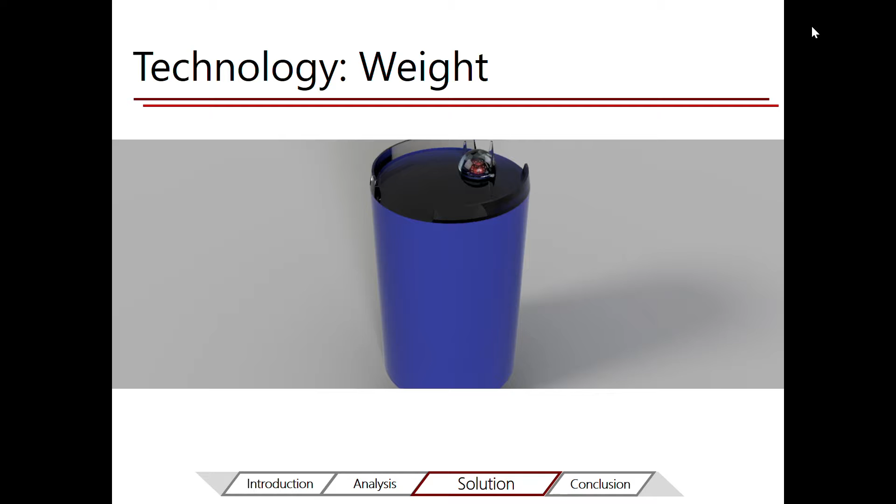So now let's look into how it looks in terms of the technology itself. This is a live rendering of what the tote would look like with its modification.

You'll notice at the very top there's a small module that houses everything this barrel uses for its modifications. That's where the battery packs would go, that's where the IR sensor is, and that's where the antennas are housed as well.

There are three key aspects to the system I want to point out. First, only one barrel will have a cellular antenna and the rest will have a Bluetooth node. We'll talk more about that later in the communications section of this presentation.

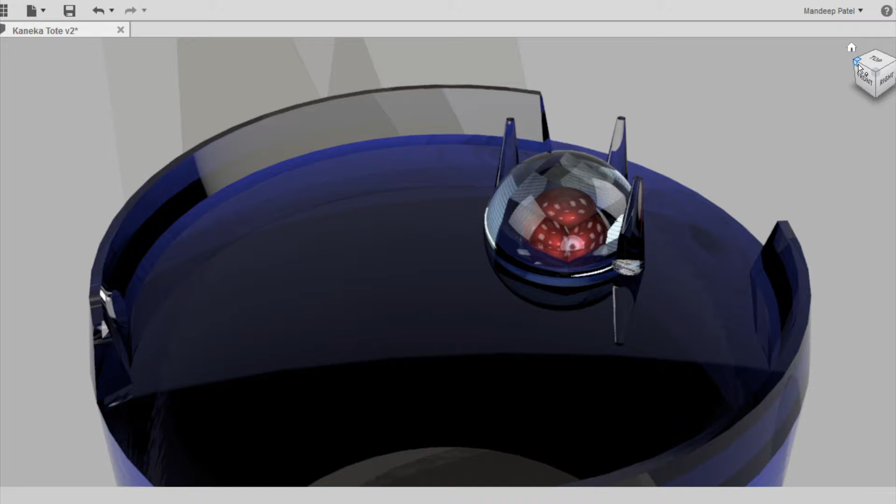The second aspect is that the bottom of the module is covered in glass, and the top can be covered with any material. That glass allows the IR sensor to look down and see how much of the material is left.

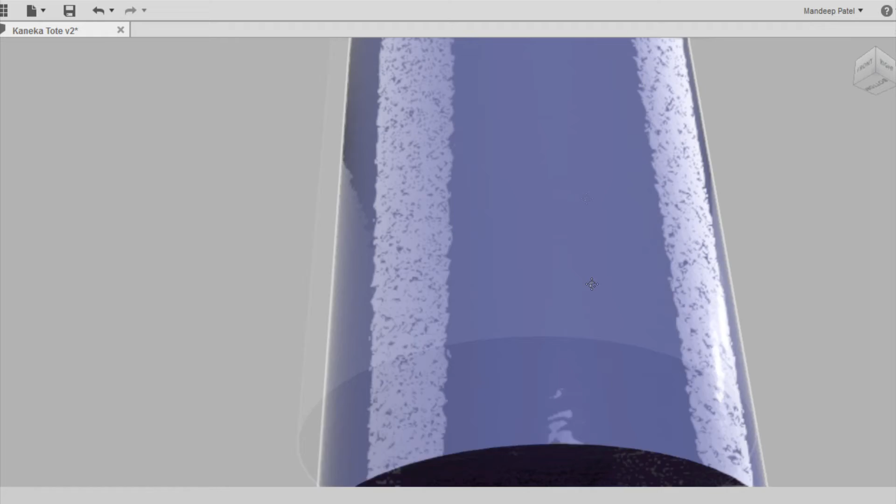The third aspect of this modification occurs on the bottom of the tote itself. At the bottom of the tote, you'll notice there's a hexagonal or octagonal outlet, which is where the material actually leaves the tote. You can see that this has not been modified in any way whatsoever.

This allows us to automate the data entry and data collection without interfering with the day-to-day movement of the totes. On the actual route, I noticed multiple points where third-party workers would move the totes from one method of transportation onto another. What I wanted to avoid for the company was having to retrain those third-party workers because of modifications made to the tote.

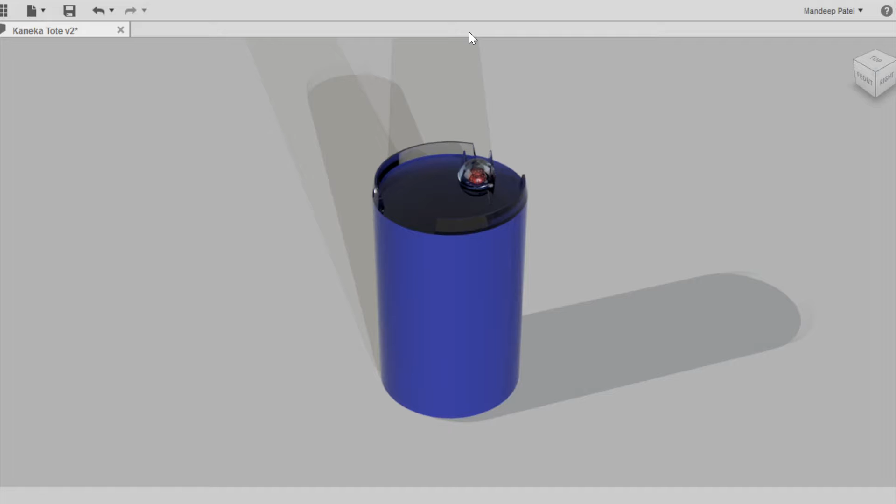So that is the entirety of the weight collection system and the modifications that would be made. Now let's talk about how the communication system works.

This allows us to create a network where signals can be sent over Bluetooth until they reach the master signal, and then that master tote can send data out to a cellular network and get that information back to home base.

This system was designed to have some overlap just in case a tote moves slightly out of position. It was also designed to reduce the cost of the system by only having one master tote using a cellular signal, which also reduces the power requirements for the system as a whole.

Lastly, this is a calculation of the cellular D-cell batteries. Using 2 D-cell batteries, the slave units have an operation capacity of 400 days, and the master unit has an operation capacity of 4 months.

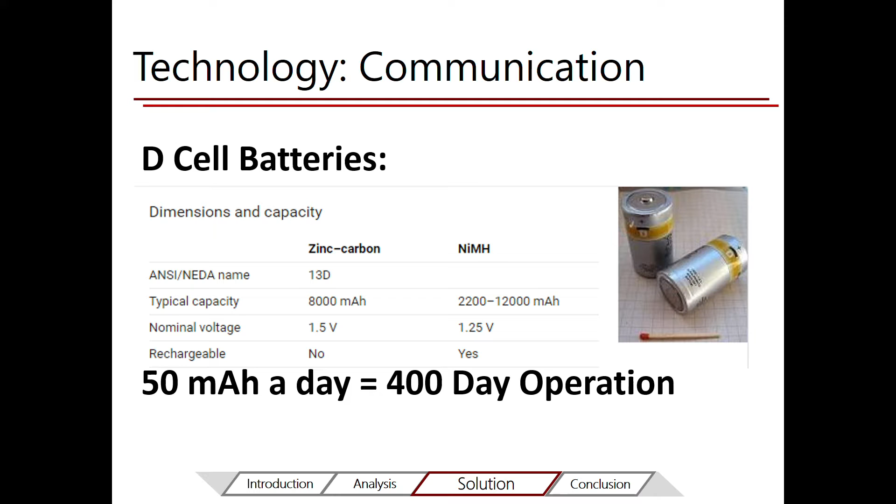This is a really good system because you're not going to be changing out batteries every single day or every single cycle on every single tote, just on the master totes, and annually you'll change them on all of the slave totes.

The last aspect of this presentation is the automated data entry. I'll quickly show you a video of how this works. Basically, the sensor nodes are sending data all the time, and there's a software package using Arduino that allows us to directly enter this into Excel.

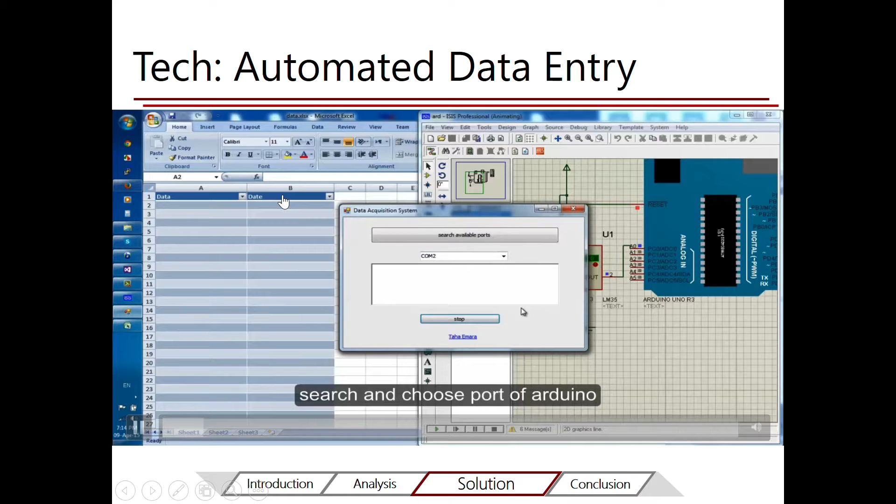You can choose which measurement you want to take account of, like location or weight, and that data is automatically logged in. You get both the date, time, and the data entry port. In this example, we were collecting temperature data, but you could do this with any type of data.

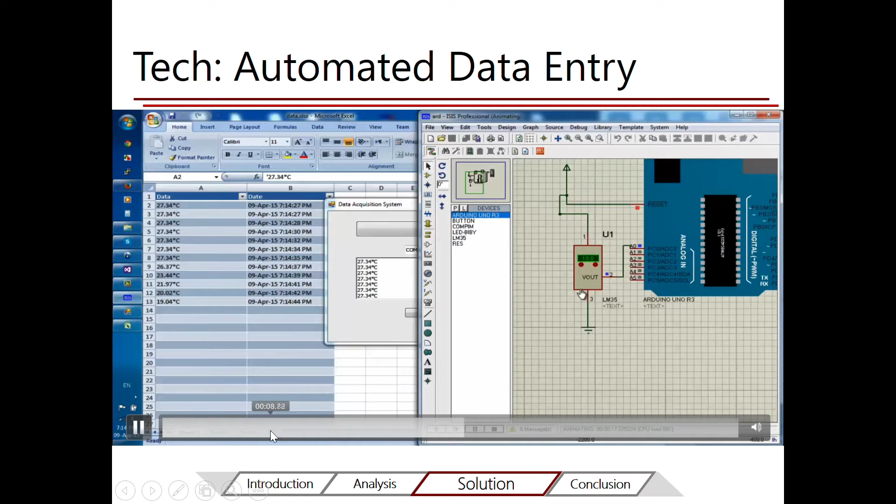So that's basically how it would work. At the end of the day, you'd be left with an Excel sheet with a row of data points, the date and time that they were taken. That's pretty much everything that I assume you guys would need in terms of data.

One other alteration we can make is to have a 3D or 2D representation of where the data was taken on a map. It's not too complicated. The cool thing about Arduino is that you can just use an API, such as Google Maps API, to have that data represented on a map itself, instead of just as coordinate numbers. That concludes the technology aspect of this.

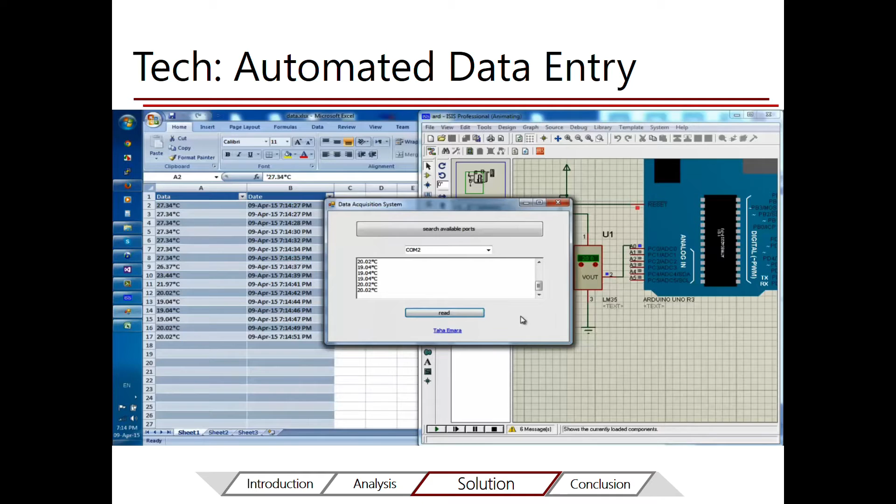Then I calculated the ROI, and it came out to 2.63 years, which is not too bad, especially considering this accounts for annual operational costs, as well as the initial cost for not only the hardware, but also the installation and any software development or retraining that would be needed. So this is a very pessimistic analysis of the ROI.

In addition, you automate the data entry, so you're able to reduce unnecessary labor costs. The second aspect is ease of use. It does not disrupt current processes of transportation. It will not affect your vendors. It will not affect your buyers. It won't alter your current rate of distribution.